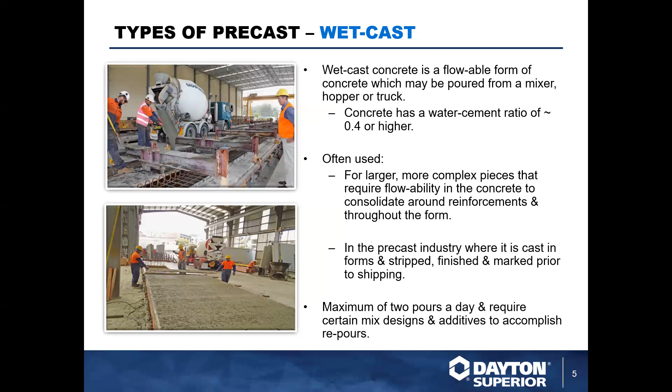Normally it's cast into a form and stripped. Here you can see a wall panel being finished at the end of a day after the pour. A maximum of 2 pours per day is possible, although that requires a specific design for the mix, the concrete. What you'll see primarily is, you come in the morning, you'll remove yesterday's pour, place your reinforcement, inserts, embeds, and then do your pour for that day to allow it to cure overnight.

Dry cast is the other type. As you can see here, precast pipe is a big proponent of the dry cast industry. This is going to have a lower water percentage in the mix, and it sets up in a way similar to hard clay, where rather than just being limited to 2 pours per day for a panel or a double T or something of that nature, these vibrating machines can get these dry cast pipes out in a matter of minutes rather than a matter of days.

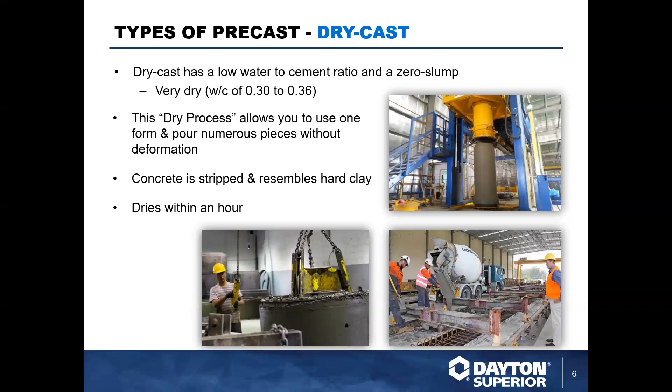So for products that are in general over and over, same design, same spec, dry cast is a great option. Wet cast is where you're going to see the primary Dayton inserts, or the vast majority of our inserts, although dry cast can make use of some of these inserts as well. Now, what we're doing in precast is often in the architectural side of things. These are wall panels with a little more intricacy. You can see this is perfect for wet cast, where each of these panels is designed in particular.

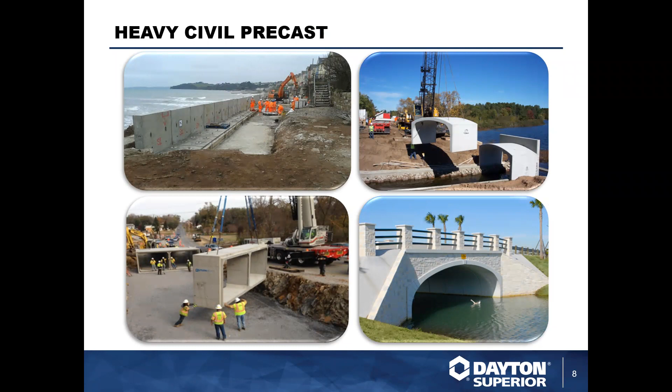We also get into infrastructure items. Here you've got seawall, underground trench, bridge segments, box culverts. Then you're also going to see a lot of our products in utility precast. As you can see here, anything going underground, larger pipe, as well as modular structures like restrooms for parks, storm shelters, things of that nature. So those are some of the products that you're going to see our products go into.

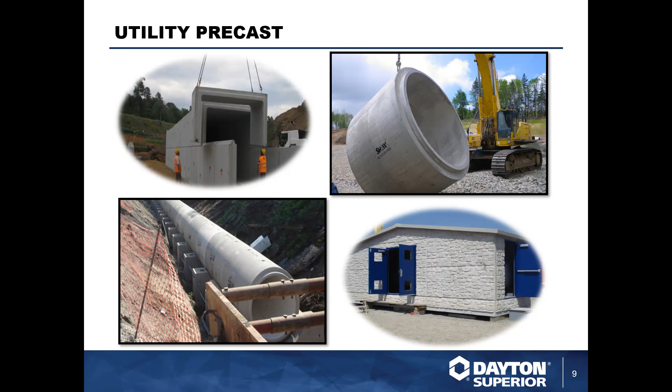If you think of a precast product, you're going to be lifting it multiple times. You're going to take it out of the bed originally, most likely transport it to your yard for storage. You're then going to load it onto a truck, unload it on the site, and then place it in its final resting place. So that factor of safety of 4 to 1 gives a little bit more of a buffer for repeated use of that insert.

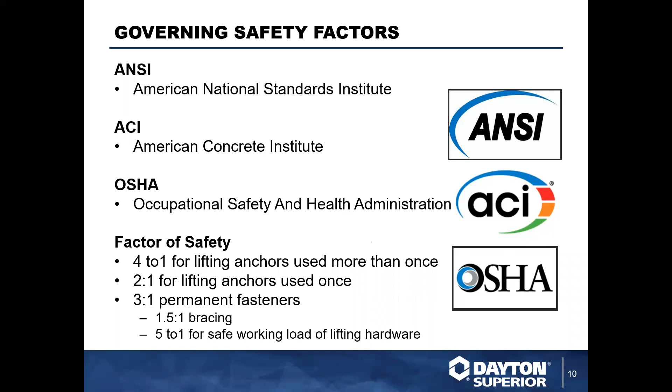Safety factor of 2 to 1 is used for inserts that are used only once. You're going to see this primarily in tilt up, where let's say a wall panel is being poured on a slab. And when you engage those lifting inserts, you're simply raising it off the slab to place it in its final resting place. Permanent fasteners are rated at 3 to 1. That's going to be similar to things like our ferrule inserts. They're holding up HVAC and piping, things along those lines.

Now, in between that coil bolt, let's say we've got the lifting hardware itself that's going to attach to your crane or lifting device. Again, we have a wide variety of things that can engage here. Everything from eye nuts and eye bolts, wire ropes, and various angles, as well as swivel lift plates. So depending on what you're creating, in your plant or out in the field, there's going to be a combination here that's going to be almost purpose-built for what you're looking at. With the wide variety, you're going to find something that's going to work for your application.

Now, the coil thread itself is kind of a fast install. It's a wide pitched thread that allows you to quickly thread things in, as well as not have to worry too much about cleaning those threads. It's not going to bind up on you just because it is so widely pitched, and that's great for field applications and lifting, bracing, things along those lines.

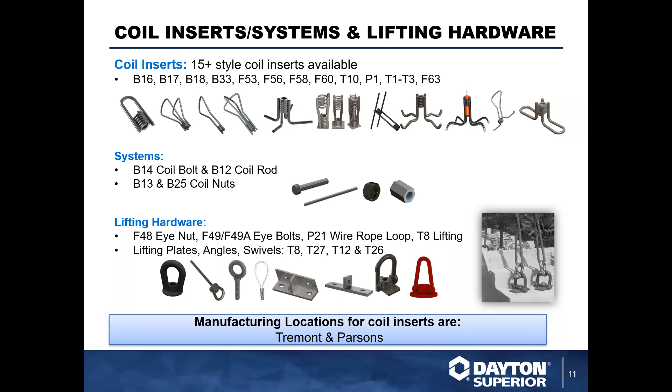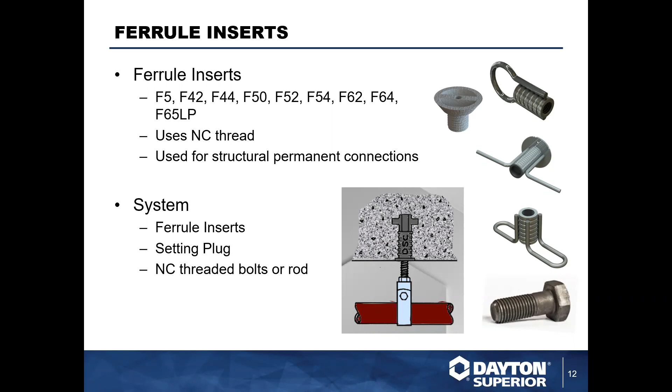So whereas the coil is designed more for lifting and bracing in a temporary fashion, this is going to be for your piping, lighting, things like that that are designed to be permanent installations. The finer thread on these prevents them from backing out over time due to any vibration. So they're purpose-built for that purpose.

Now, the first quick connect system I'd like to talk about today is our Swift Lift. This is one of the first quick connect systems on the market. As you can see here, it's been around since the 1970s, so it should be familiar to many of you that have been around precast. It uses a non-welded hot forged anchor. It's got the 4-to-1 safety factor that we talked about. The hardware itself is 5-to-1.

That offers a buffer of safety where when you're designing your product, the lifting hardware doesn't necessarily need to come into it. You're more looking at the safety factors and capacities of the inserts and the concrete surrounding it. We offer them in a number of tonnages, so it can be tailored to your particular application. Offers a lot of flexibility in that regard. You see this product primarily in utility and heavy civil stuff.

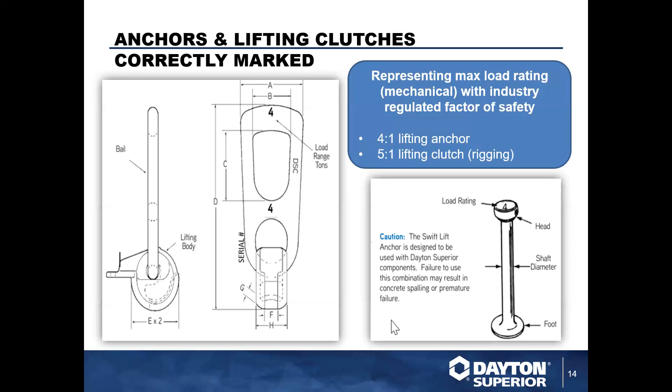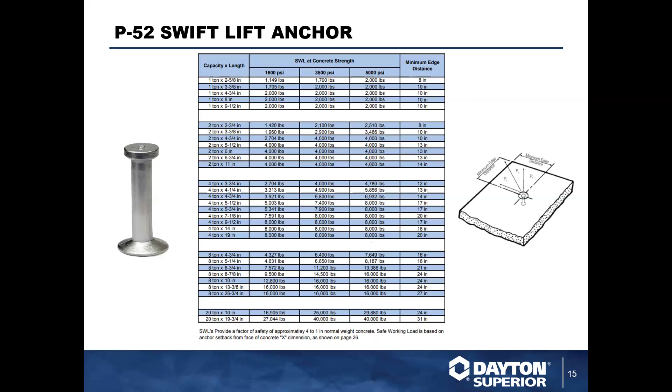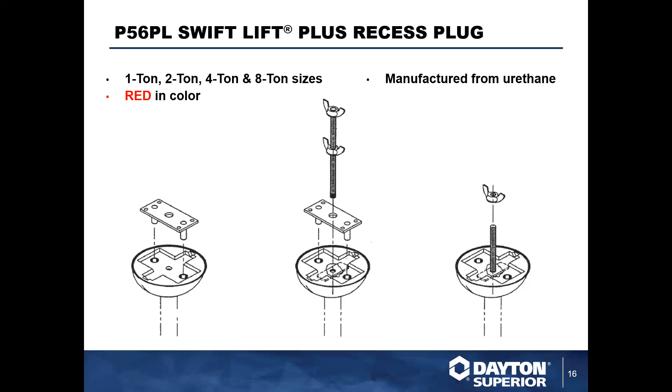They're red, and they are a pliable urethane, which allows you to use them many times if taken care of, and I think sunlight is really the big player to break these down. It has good resistance to tearing, heat, and chemicals, so as mentioned, if you take care of these things, clean them off after each use, they should last you quite a while.

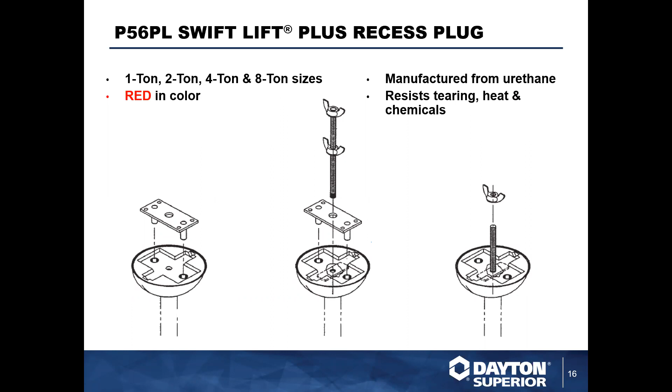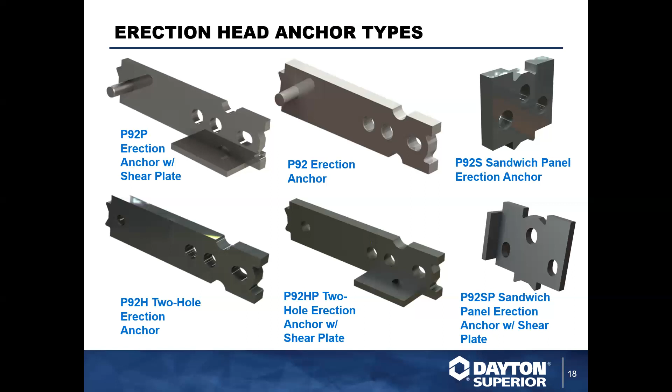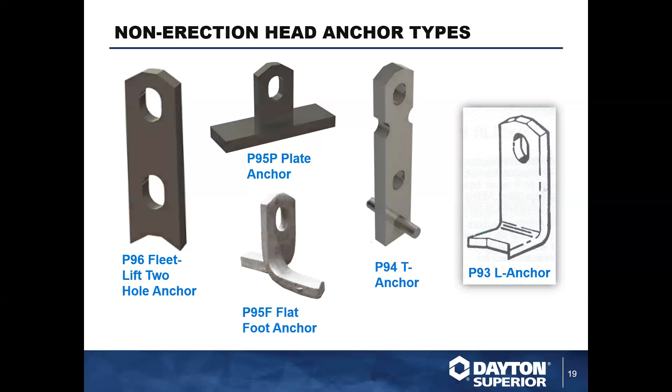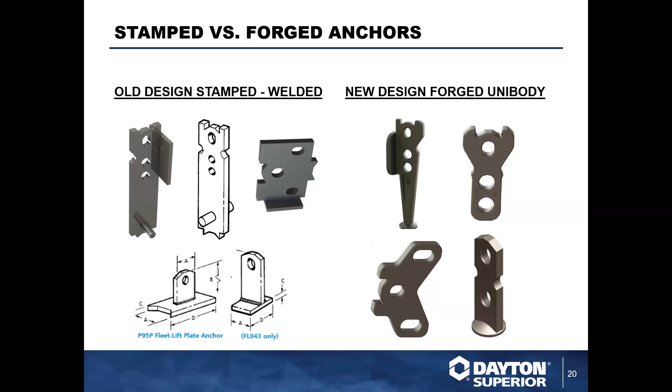And just as a general note, there are some benefits to forged material in general. There's higher strengths, first of all, as well as a general resistance to rusting compared to a stamped steel uncoated insert. There's also less concern with low temperature embrittlement. It's just a little bit better in those regards in comparison to the older stamped stuff. We do offer both in galvanized though, so if rusting is your concern, I think you're covered on both sides so long as you get it coated.

We also offer magnetic versions if you have steel forms. Just ask us about that if interested.

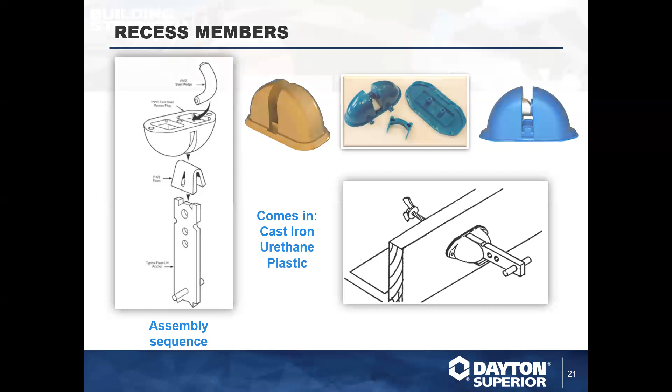Now we'll get into our utility system. This is going to be, as the name implies, much more for utility precast, be that larger pipe or box culverts. We offer recess plugs similar to the other systems, holding plates, etc., and also magnetic setting plates as well.

Now, one thing that sets this apart, the utility anchor group from the Swift Lift and the Fleet Lift we mentioned, is that there isn't any proprietary lifting clutch that's needed. This offers quite a few benefits. As a precaster, I know some don't like lending out their relatively expensive hardware. They end up growing legs and walking off on you, or coming back damaged.

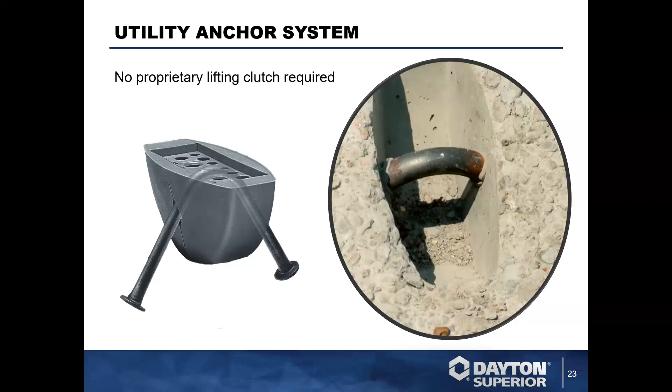So this allows placement crews, or some erectors even, to place these concrete elements without having to have that handoff. You can use a standard hook, as we'll show here. So a hook or shackle will go in just like that.

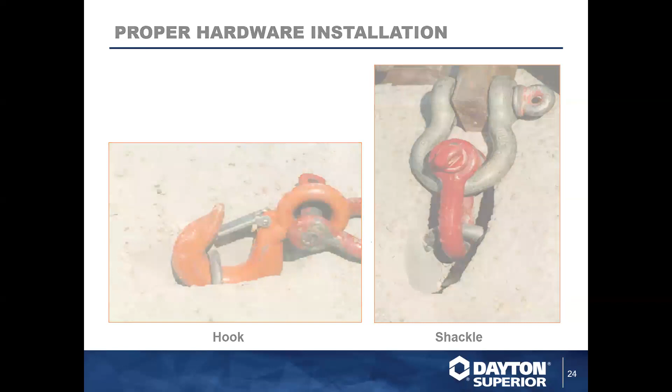Here's another one of our charts from our handbook. All I'm going to point out here is that for this utility anchor group, we offer 4, 5, and 6 UAs. That refers to the minimum panel thickness, and there's two versions of each. That first number refers to that panel thickness. And after the UA, you can see we have a 444 and 671 version, which refers to the diameter of the insert. The 444 is a little lighter duty, whereas the 671, being thicker, offers a little more capacity. So this allows you to really dial in which inserts are good for your particular application.

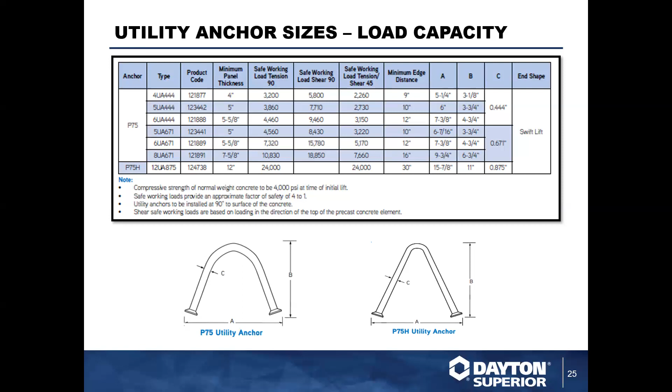It goes all the way up to that P75H, with a 12-inch minimum thickness, going to 24,000 pounds.

So here's our utility recess members. We have 90-degree options, where the insert faces straight down away from the surface, as well as 45-degree, which are angled to that 45-degree mark. We offer them in these reusable finishes, orange and blue urethane rubber.

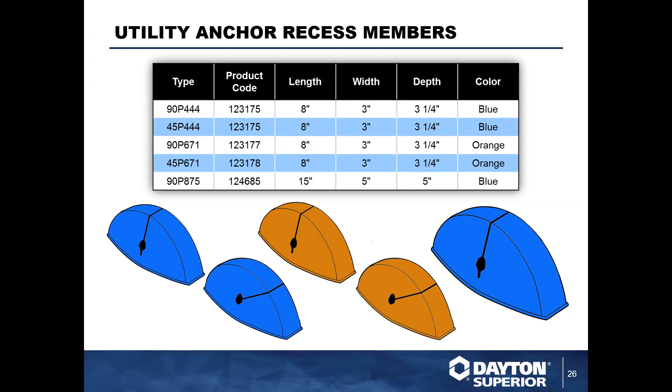This is a relatively new product to us, our P75R. It's similar to the UA, but designed for retaining wall blocks and small slabs. This can be wet set using the void former, as you can see in the bottom right. It's got multiple diameters and lengths, and it's pretty easy to install. Just like the utility anchor, there's no proprietary lifting hardware required, and it's also tested with our Fleet Lift lifting hardware as well.

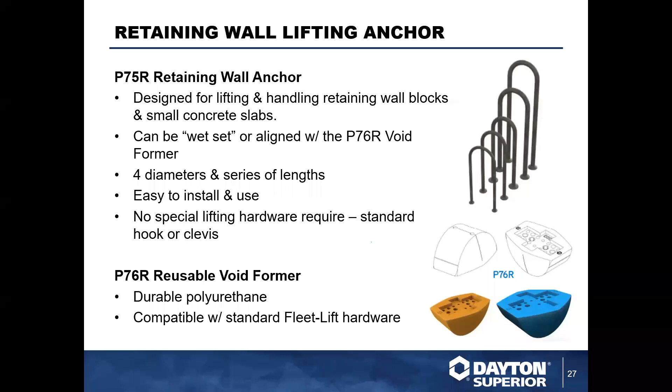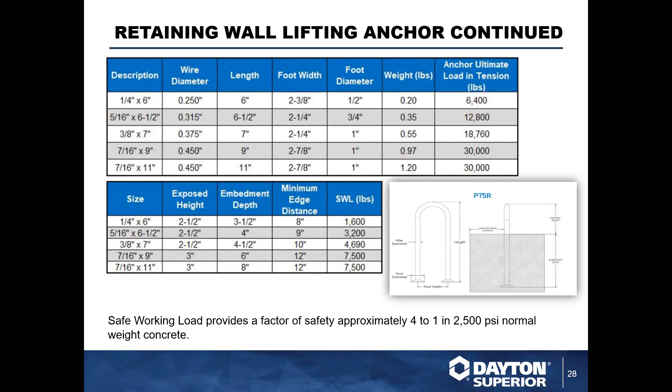Here's another chart showing some of the sizing data and diagrams of how to custom pick your P75R. Just like the others, it'll show you the different lengths, the different diameters, and the loading data there. These can all be found in our Precast handbook, a great resource. We have PDFs available online of that handbook, up to date.

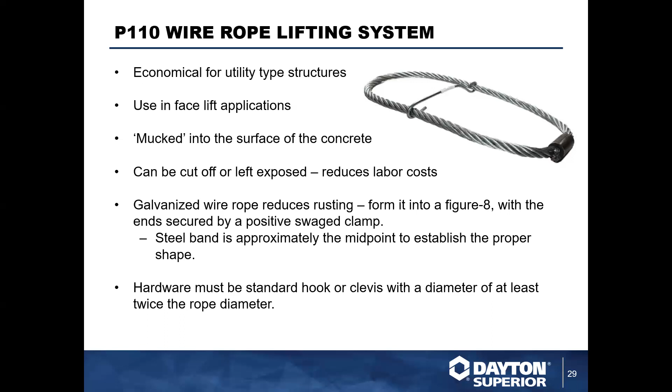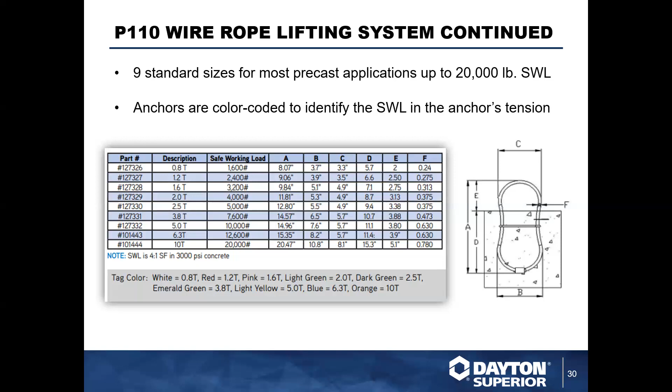These products come in, I believe, 9 standard sizes, all the way up to 20,000 pounds safe working load. We see this chart here again with loading data, but what I'll point to is that for these P110s, at the bottom of that chart, each one is fitted with a plastic color-coded tag. So let's say in your facility you have 3 standards that you use. That color-coded tag will easily allow you to make sure that the right wire rope is going into the right product.

So that's kind of it. As we said, it's a very broad overview of some of our systems - the threaded inserts with our coils and ferrules, Swift Lift, Fleet Lift, and utility anchors.

As I mentioned, we have plenty of resources online for you to peruse. You have us as resources - myself as TSR, as well as my counterparts in the Central and the West, your local dealer sales manager. Do check out our website - the handbooks and tech data sheets are great resources and hopefully can address some of your questions. If not, you've got us here to help anytime. Give us a shout.